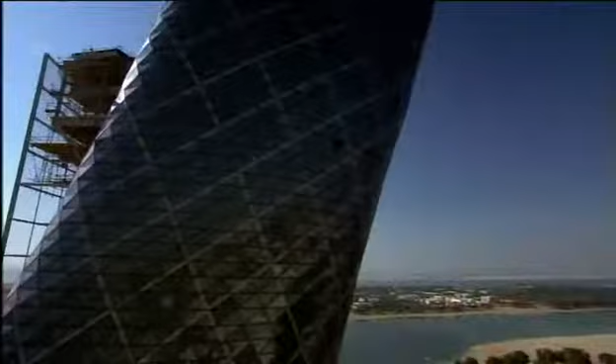Dubai is famous for its audacious engineering projects. But now, its neighboring city, Abu Dhabi, could surpass them all. This is Capital Gate, the most inclined skyscraper on the planet. It defies gravity, leaning at almost 5 times more than Italy's Leaning Tower of Pisa.

To make it stand up, it'll take some extraordinary engineering that could rewrite the skyscraper rulebook.

Situated on the edge of the Persian Gulf lies the Sheikhdom of Abu Dhabi. It's the largest and richest of 7 states that unified in 1971 to form the United Arab Emirates. Abu Dhabi is undergoing one of the biggest makeovers of modern times.

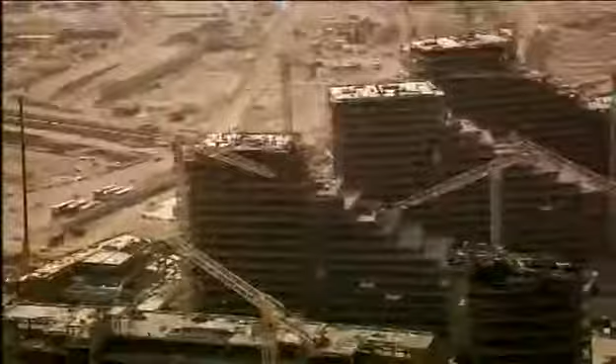Its ruler, Sheikh Khalifa bin Zayed Al Nahyan, wants to join the City Super League. And he's spending over $200 billion to transform his capital into a world-class business and tourist destination. He's already spent a reputed $3 billion creating the most expensive hotel ever built.

The Emirates Palace boasts 114 gold domes and is the height of luxury, where rooms cost up to $12,000 a night. And that's not all. He's built one of the largest and most opulent mosques on earth. Capable of accommodating 40,000 worshippers, the Grand Mosque boasts the largest carpet on the planet and the world's biggest gem-encrusted chandelier. But even these structures have not quenched his thirst for the extraordinary.

Now, the Sheikh wants a building so spectacular, it will instantly become an international symbol for Abu Dhabi. The man appointed with the task of delivering this architectural icon is the Sheikh's cousin, His Highness Sheikh Sultan bin Tahnoon Al Nahyan. Architecturally, it will be a unique building, positioning Abu Dhabi as one of the cultural hubs around the world. And architecture is part of that overall inspiration and art.

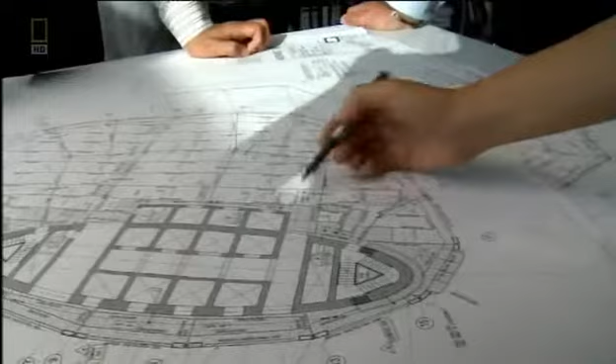It's a tough challenge. This is a land where extreme engineering is the norm. Neighboring Emirate Dubai has already built the world's tallest skyscraper, the 828-meter-high Burj Khalifa, and an iconic luxury hotel, the Burj Al Arab. Sheikh Sultan signs up a team of architects and gives them a clear brief, not to go bigger or taller, but to challenge the rules of architecture.

For Neil van der Veen, one of the concept architects, it's a unique opportunity. The spirit of the times in the UAE was that anything was possible. Really, you could do anything. We can do something in the architecture that will represent that Abu Dhabi is right at the cutting edge.

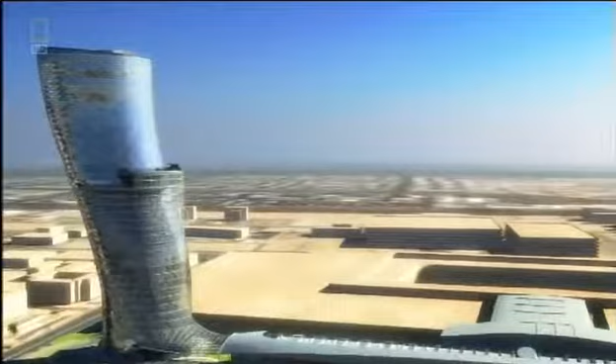The team come up with an extraordinary design. A tower that spirals out of the ground to 160 meters, inspired by a desert whirlwind and the splash of a wave rising over the sand. This gravity-defying skyscraper tilts almost 5 times more than Italy's Leaning Tower of Pisa. No single angle of this tower is the same as another. It's a structure guaranteed to amaze.

We really wanted this to happen. They could see a vision suddenly. They could see something that would stand for them. Then there was no stopping us. Sheikh Sultan wants the lower floors to become the most prestigious office address in Abu Dhabi, with the top 18 levels assigned as a 5-star hotel fit for royalty.

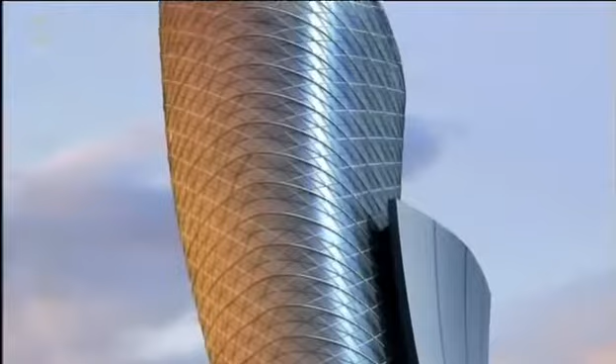But for maximum impact, this landmark skyscraper also needs a prestigious location. The Sheikh decides the tower will stand next to a monument of national importance, the Grandstand. Built by his uncle and founding father of the United Arab Emirates, Sheikh Zayed, it's used to this day for national celebrations. This monument and the skyscraper will link Abu Dhabi's future with its past.

Over the past 50 years, this land has experienced extreme change like no other. The discovery of huge oil reserves in 1958 set the wheels of progress in motion. Abu Dhabi's ruler, Sheikh Zayed, had a vision to unify the sheikhdoms and secure their financial future from Western dominance. He then set about using his black gold to create a city that rose out of the desert.

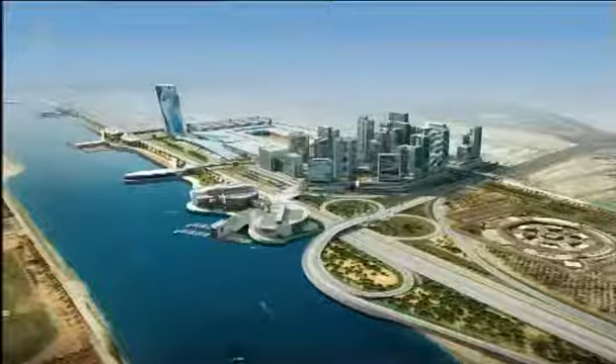Today, Zayed's legacy is all around, and now his son wants to leave one of his own. To transform Abu Dhabi once again, but this time to put it on the world map. Sheikh Khalifa plans a new $2 billion business district called the Capital Center, situated alongside the Middle East's largest business hub, the Abu Dhabi National Exhibition Center. It's the ideal location for an architectural icon. And inspired by its location, the new tower is named Capital Gate.

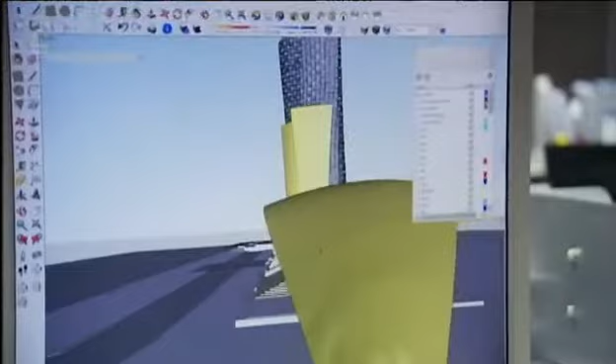Now, the idea must make the leap from the drawing board to the construction site. The only problem is, no one has ever attempted a skyscraper like this before. Everyone realized that this is a crazy structure to build, and how are we going to build it?

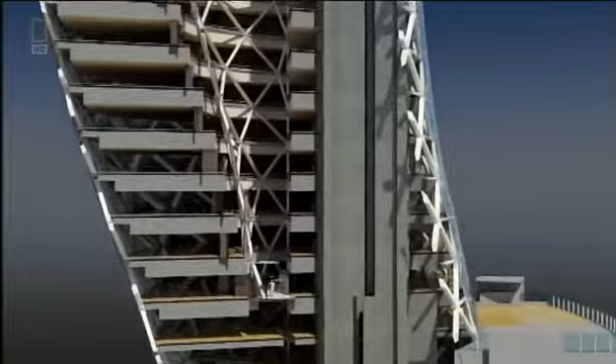To make Capital Gate's gravity-defying design a reality, it'll take some extraordinary engineering, and the challenge begins on day one. Its top floors overhang its base by 33 meters, creating huge forces that want to rip the building's foundations out of the ground.

At the construction site, project architect Tony Archibald is daunted by the task ahead. When I first joined the job, I was shown the drawings, and I kind of did a double take, and I wasn't quite sure that I got the correct understanding of the project, and it took me a few moments before I realized what we were about to undertake.

Keeping Capital Gate upright is a huge engineering challenge. There isn't just one solution. To overcome the forces of gravity, it will take a whole range of pioneering techniques. But the task starts with the foundations deep underground. On one side of the building, the weight is going down into the ground. On the other side, it's being lifted out of the ground. And that's due to the large overhang that we're having to deal with.

The solution requires almost 400 concrete piles that work in 2 different ways. On the leaning side, half of the piles push the overhang's forces into the ground. On the opposite side, the remaining piles anchor deeper into the bedrock. They resist the stretching forces trying to wrench the building out of the ground.

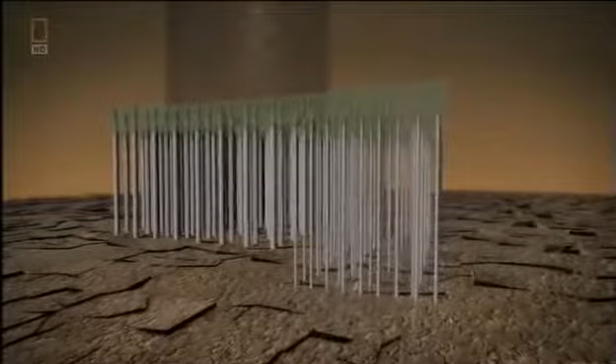Finally, to evenly distribute Capital Gate's forces into the piles, a deep concrete slab reinforced with steel is laid on top. What the foundations taught us is that every single aspect of this building has to be custom engineered.

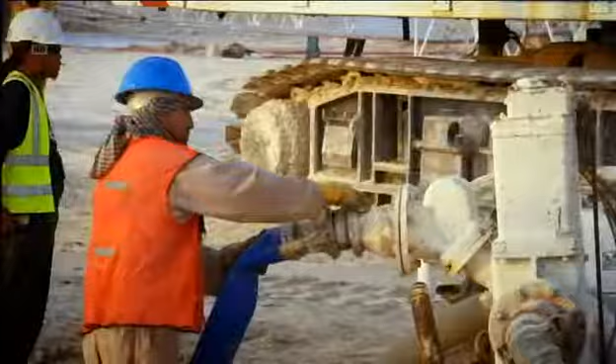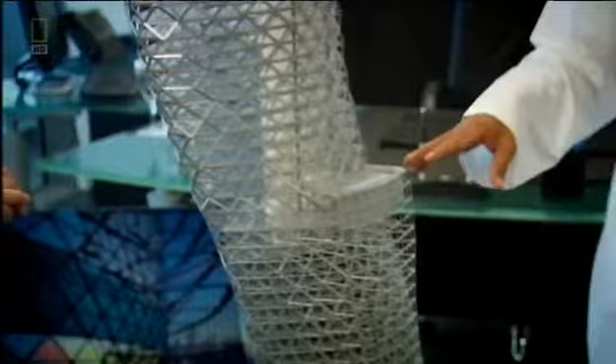Excavators dig out a colossal 6,000 cubic meters of sand. And over 8 weeks, hundreds of piles are driven into the ground. We had an awful lot of piles to put in very close proximity. It was a really difficult challenge. There can be no let-up on this schedule. Sheikh Sultan wants Capital Gate complete by an impossibly tight deadline.

In less than 2 years' time, Abu Dhabi will host the World Future Energy Summit. Over 3,000 delegates from 50 countries and the world's press will convene at the neighboring Abu Dhabi National Exhibition Centre. It's the perfect opportunity to showcase Capital Gate and prove Abu Dhabi is at the forefront of innovation.

But this gives the team just 24 months to design and build a unique skyscraper. With the foundations finished, building above ground can begin. But because of the dramatic lean, it will have to be constructed in a very different way to a conventional skyscraper. We realized once we'd done the foundations that this was going to be the first of many difficult problems.

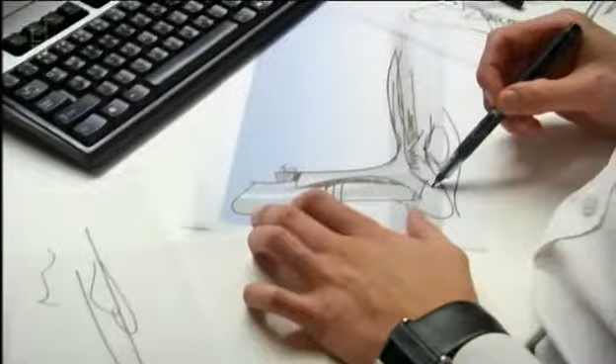A normal skyscraper requires a solid core to hold it upright. But Capital Gate's curves would just crack and topple a standard core. Engineers must discard conventional thinking and devise a way to defy gravity. Inspired by the nearby desert landscape and its wind-shaped dunes, architects have designed a curved leaning tower. But it'll take some audacious engineering to stop Capital Gate from falling over.

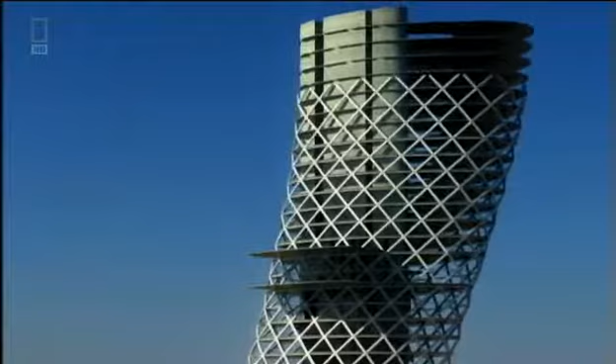Normal skyscrapers are built around a slim vertical core, which helps to channel the building's weight into the ground. There's so much overhang on this building that a conventional core was no way going to work. You just can't build a straight core. It's just not strong enough. Capital Gate's design would cause a conventional core to bend dangerously. The pull of the massive overhang wants to stretch the core on one side, causing the concrete to tear apart.

Structural engineer Mona Vassi knows it's a serious problem that must be solved. When I saw this one, I thought it's impossible, it's not going to work. It's just some sketch somebody left somewhere. But I always think that for the architects, it's easier for them to just draw something, but it's not easy for us to fulfill or satisfy their needs.

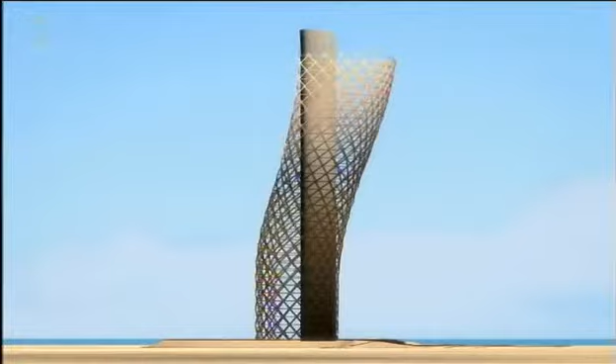The engineers developed two groundbreaking solutions. The first part of their plan is to build the core with a curve, bending in the opposite direction to the building's lean. As the structure grows, its weight pulls the core straight. In total, it shifts 350 millimeters, and the effect is significant.

The concrete that would have been stretched by the overhang's pull will now be compressed and strengthened. You build it bent, and then as you add the slabs to the upper levels, it pulls it back into vertical. So basically that whole vertical core is in compression, and that gives it immense strength.

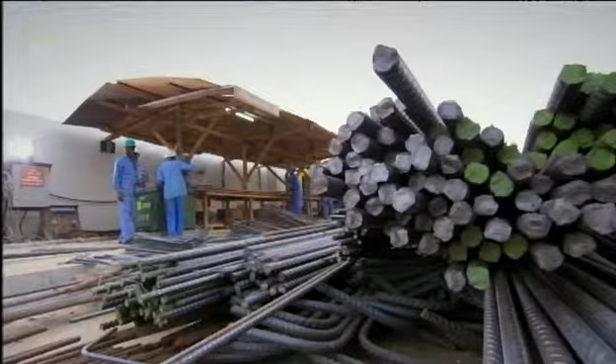The core grows 4 meters a week, and construction manager Les Fairchild is in charge of building it. This is probably the most complex core that I've come across. It's built at an angle and effectively the core holds the whole building up. The core is built using a technique called jump forming.

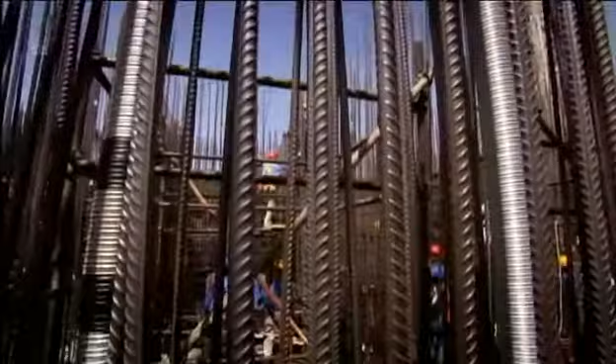First, a dense mesh of steel reinforcement is assembled. A mold then closes around the steel to form the shape of the core. The steel mesh is then filled with concrete. Then the mold or form can climb up the core wall for the process to start all over again. Jump form is a hydraulic platform. Once we've cast each 4-metre level, we simply attach it to some runners and we jump it hydraulically up to the next level.

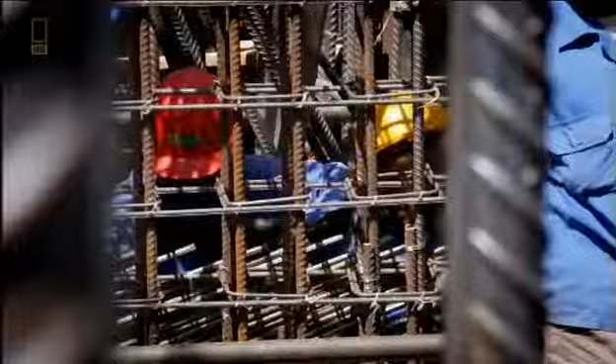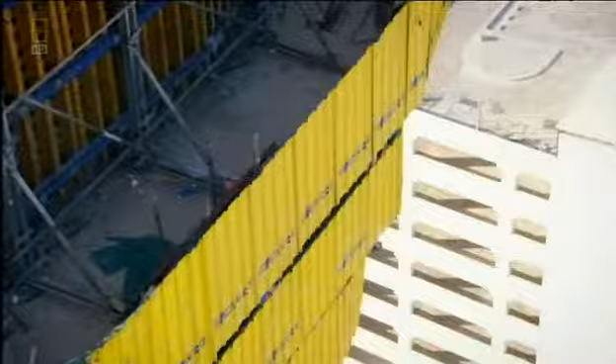The core will be strengthened as it straightens. But for the core to carry extreme loads, the concrete must be reinforced using steel rods called rebar. The rebar is installed during the daytime, but temperatures of up to 50 degrees Celsius and concrete don't mix. It dries too fast and could crack. To set at the right speed, the concrete has to be poured during the cool of the night.

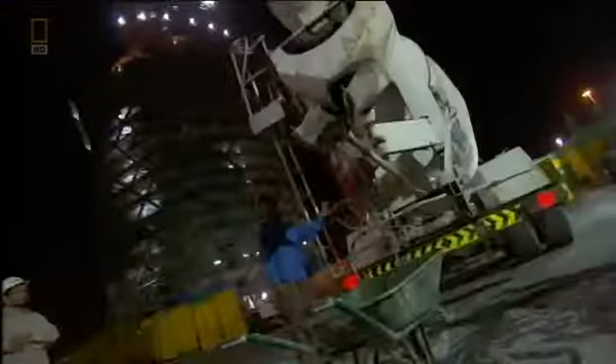As the core grows higher, the liquid concrete has to be pumped over longer and longer distances. So the consistency of every batch is first checked in a slump test to ensure it won't block the pipes. When you first see it coming out the wagon, you can usually tell whether it's a tight mix or a loose mix, and that's what we're testing for really in the slump test. We simply make a cone, lift the cone off, and depending on how much it reduces in height, tells you exactly what the slump is. The one we just witnessed is 215 millimetres, which is within the specification, so that's good to go.

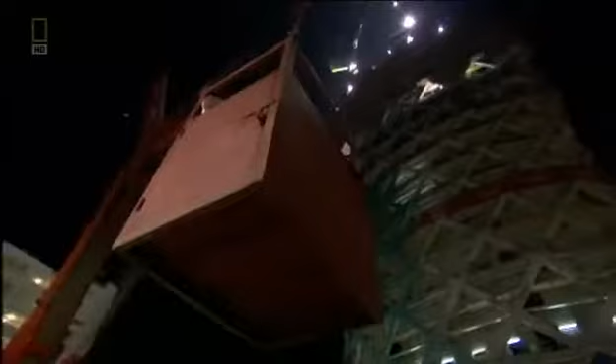Whilst the truck drives to the pump, Fairchild needs to get onto the core. He can take the stairs, but 90 metres up is a long climb. He knows a much faster way. Crane lift.

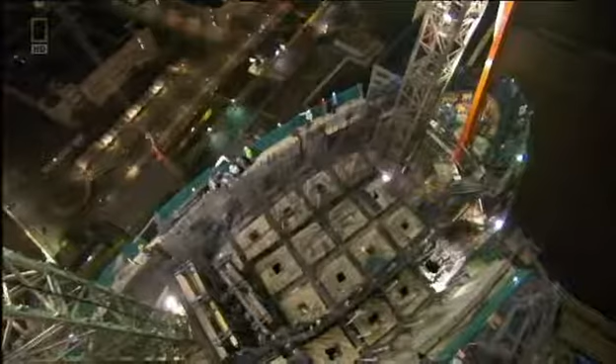It's going fairly well. We've had a nice continuous supply of concrete, and we're now pumping it up to the upper levels of the building. And the lads are just steadily working away. They actually work from one side to the other in metre deep layers, so they're doing everything right. It's always exciting when we pour concrete. It means it's another achievement really. We're going up another level.

But building the core out of alignment and packing it with rebar still isn't enough to stop gravity toppling Capital Gate. What we came up with is a post-tensioning solution where we introduced much more reinforcement into the core wall and then used the tensioning process. Basically that was done by introducing high tensile strands to the centre of the walls.

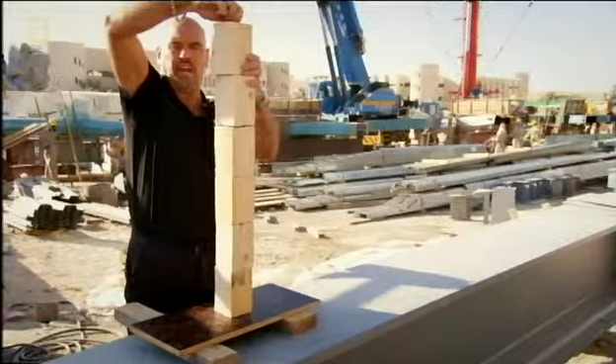When we reach the designated height, we simply apply tension. We're actually stretching the tendons that fall through the wall, and we're pulling them tight, and that's done by a tensioning machine. So effectively, when the tension is complete and the load was applied, the core would stay intact, and the additional reinforcement would prevent it from falling over. To post-tension the core, 146 steel tendons are threaded vertically through the concrete.

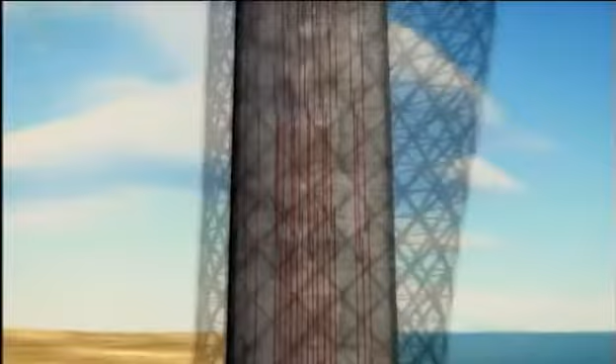Each tendon is 20 metres long and runs through 5 floors of the building, overlapping each other for maximum strength. When the tendons are stretched, the stress counteracts the pulling force created by the massive overhang, stopping the concrete from tearing apart. Okay, stop. Okay, start moving. On site, the team are post-tensioning the core. But no one has ever attempted this vertically in a skyscraper.

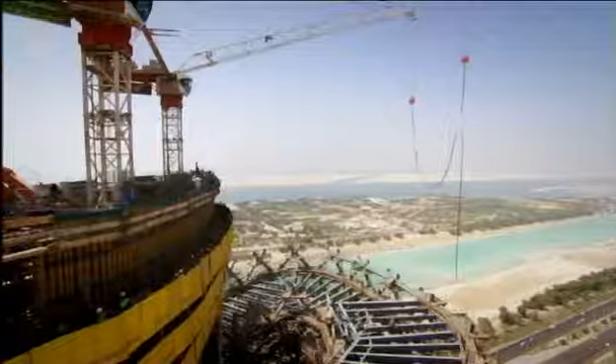The long tendon is lifted to the top of the core. The team used the steel tendon's weight to force it through a duct already cast through the core. Once the tendon is in position, the team lock off both ends, ready to tension its individual strands. A pneumatic jack clamps around one strand at a time and stretches it. It's equivalent to about 5 family cars pulling on one end of the rope.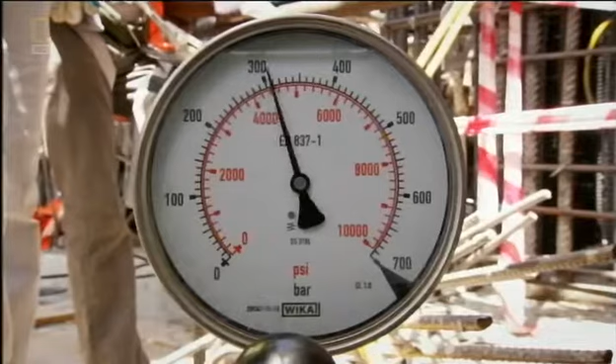With the steel tendon now stretched to the right stress level, concrete pouring can continue upwards. The quantity of cable that's being used is approximately 120 tons and 120,000 meters in length. It's about 44 times the Golden Gate Bridge. This process is repeated over and over and means the core should withstand the huge loads generated by Capital Gate's extreme overhang.

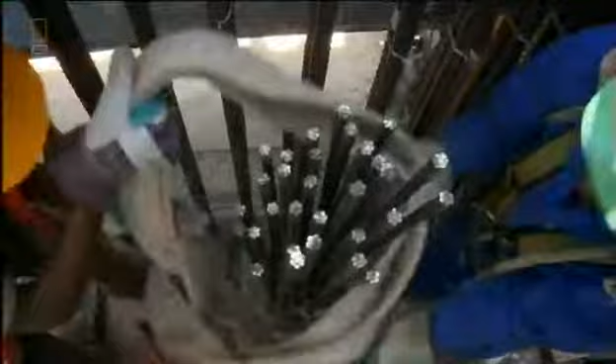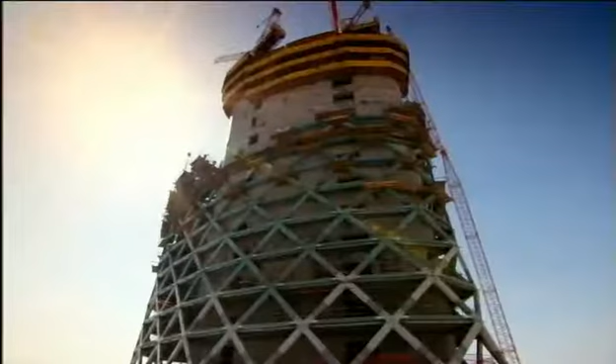But now, an even greater challenge must be tackled. The building's twisting, leaning design must somehow be turned from theory into reality. And once again, it'll mean bending the rules of architecture. To create Abu Dhabi's architectural icon, Capital Gate needs an exterior curved leaning frame. But once again, the building's extreme tilt creates a problem.

The shape of the building with this very pronounced overhang meant that traditional skyscraper building solutions just weren't going to work. There's no way. The building design requires it to be thin to maximize floor space and allow for huge panoramic windows. Irfan Ahmed is one of the engineers who has to find a solution. For structural engineers, always it's challenging to accept the architectural requirement, you know. They always want thinner and thinner and thinner.

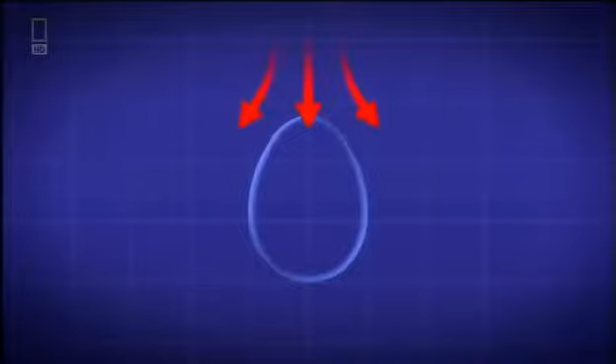Surprisingly, the humble chicken could help with this engineering dilemma. It is essentially a skin of structure around the outside of the building, not unlike an egg. An egg can withstand huge loads because it evenly distributes forces down through its shell, which means the shell can be thin, creating more space inside. So it's very, very thin, it's very, very strong. If I try to crush this egg, you can see that it's actually amazingly resilient. So let's see how resilient.

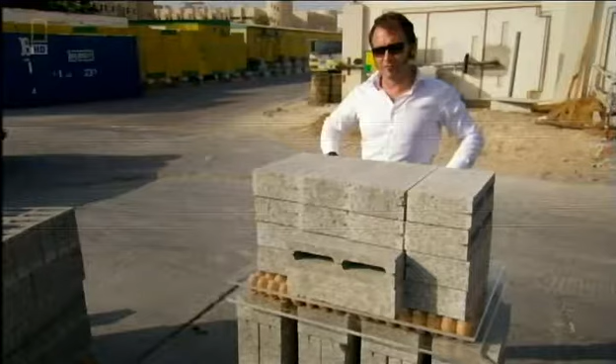Here I have 170 eggs laid out, and we're going to put load on top of these in the form of breeze blocks. Moment of truth. So far, so good. Each one of these blocks weighs 15 kilos. So we've nearly got half the weight of a car on here now, on our 170 eggs. Let's see how far we can push this. That's 30 blocks, and I think it's about to go. It's going big time now. This is it. This is the end.

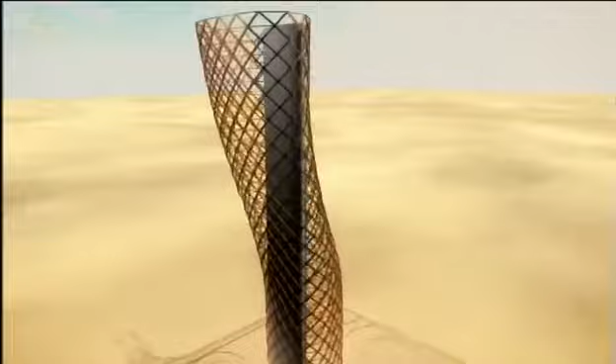A diagrid is a giant mesh of steel that wraps around the core. Steel beams connect to a node or joint to form a cruciform section. 720 uniquely shaped sections link together to form the thin but immensely strong diagrid. Working together, these cruciforms equally distribute the forces down the outside of the building. The way it does that is by making a uniform net, so that the forces are very evenly distributed. And that means that we can get away with slenderer sections.

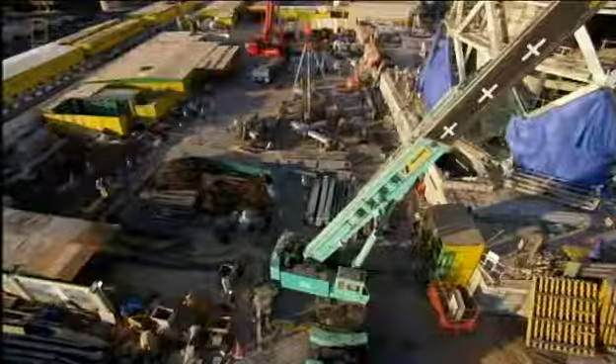On site, a team of 240 steel fabricators assemble the diagrid. They've built the easier straight part of Capital Gate's base, but now the structure is starting to lean, making installation even more challenging. Each cruciform, weighing up to 16 tons, has a unique geometry and must be crane lifted at a precise angle. If the diagrid is not assembled with millimeter accuracy, the mesh will not channel the loads and the structure could be weakened.

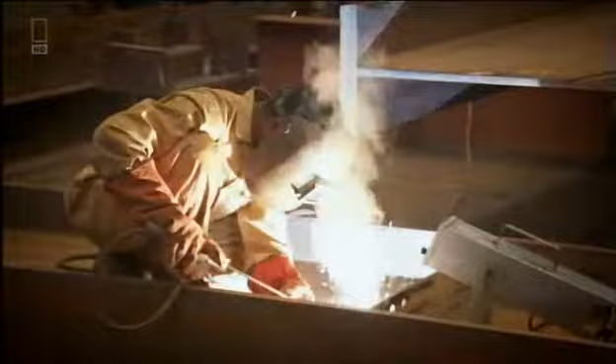The engineers must communicate closely with the expert steel fabricators. They design and manufacture the diagrid 150 kilometers away in the neighboring emirate, Sharjah. Here, cutting-edge construction is the norm. They've built one of Malaysia's Petronas Towers and Dubai's iconic skyscrapers, the Burj Al Arab and the Burj Khalifa. But Capital Gate's revolutionary design pushes even these experts to the limit.

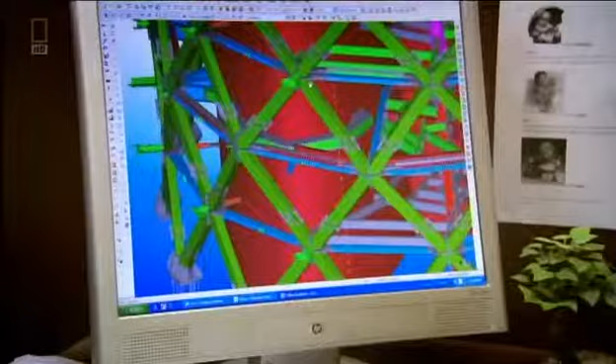On the planning floor, project engineer P. Bhaskaran and his team need bespoke 3D software to tackle the building's highly complex diagrid. The 3D modeling is done, and any unforeseen criticalities will be very clearly identified in the 3D model. Each one of the 720 cruciforms is precision engineered, not only to channel huge forces, but to connect with millimeter accuracy to the neighboring cruciforms and the glass facade. But to measure their exact angles, the team used some old-school technology: chalk. It might look unsophisticated, but it's highly accurate, ensuring all the elements will join together.

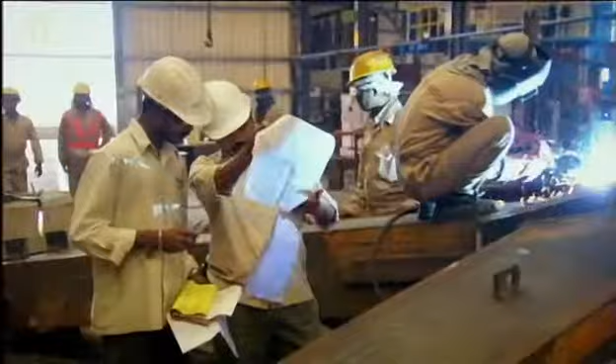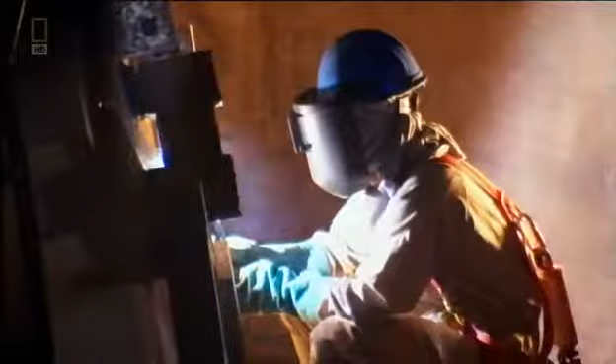To keep up with construction, the factory must produce 18 cruciforms every week. Constructing such a huge building, a critical building within the short span, without working 24 hours, it is absolutely not going to happen. As the skyscraper reaches new heights, the long hours start to pay off. This design pushes the diagrid technology to its absolute limit, and in fact far beyond what's ever been achieved so far. Even in your dreams, you're thinking about this project. So once you see the structure coming up, you forget all the long hours you spend and all the sleepless nights.

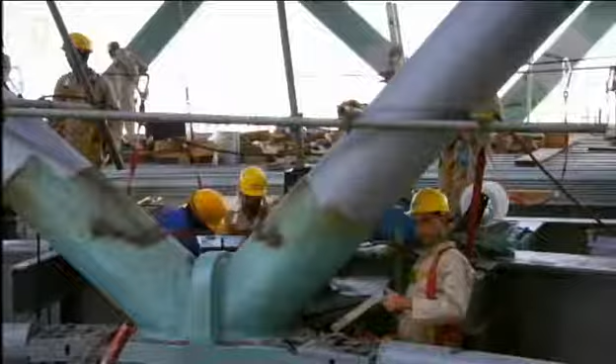A colossus is fast emerging from the Abu Dhabi sands. Now, this leaning tower must be clad with a glass facade. And as always with this gravity-defying structure, it's going to require some revolutionary engineering.

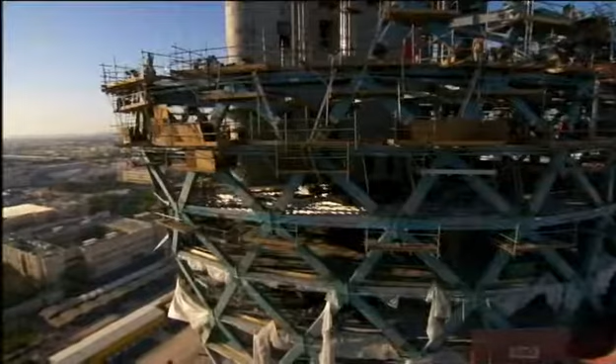Glazing Capital Gate's leaning curved frame is a major problem. Covering its unusual contours with curved glass will blow the budget. So the skyscraper's curves must somehow be clad using cost-effective flat glass panes. Fortunately, ancient Greek geometry can help.

Because you've got a complex shape, it's an organic shape, it's a curved shape. The only way to model that with straight lines is to use triangles. Triangular panes can pivot in 3 directions, and when joined together can cover complex geometric surfaces. But because every angle of the building is unique, it'll take 26,000 triangular panes to form the facade.

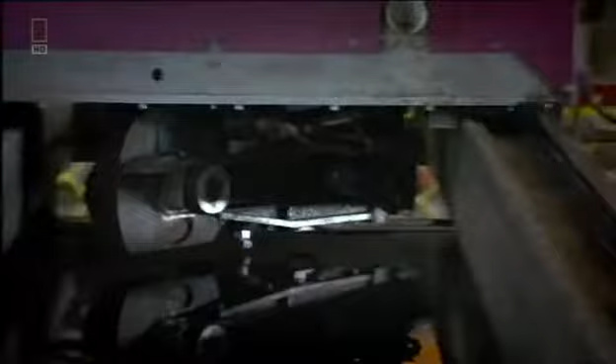With so many glass triangles to cut, the local glass factory springs into action. Each pane is scored by an automated diamond cutter to an exact pattern. The triangles are then sent along the production line. The team is under constant pressure to deliver enough glass to the site. Hey, this side, 2 guys, hold it.

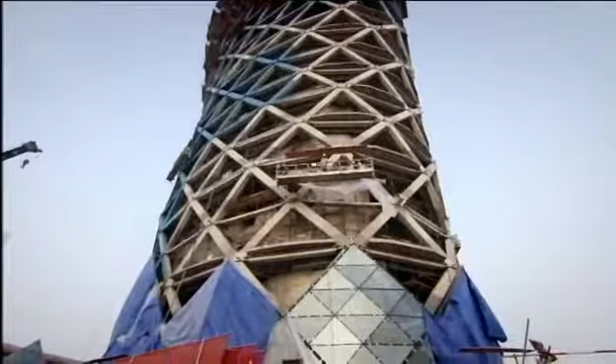After several weeks, 8 diamonds are in place and another 100 standing by. But the glass design is so unconventional, it still has to pass a number of tests to prove it's up to the job. Because we'd already started the glass installation, the results of this test were absolutely key. Each panel is stacked one upon the other. So if we'd had any kind of problem, we would have had to unstack them, which would have had disastrous consequences for the program.

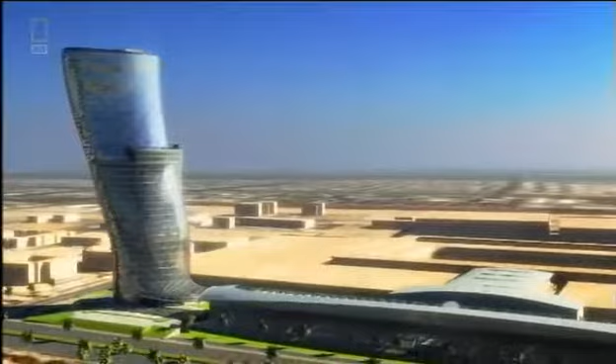This is no ordinary glass skin after all. Capital Gate's core straightens as it grows. The skyscraper will not stop moving until after completion. Normal glass facades can accommodate minute movements caused by wind and temperature changes. But to stop the glass shattering and keep the building watertight, the panels must be designed to shift by up to 20 millimeters. The scale of that kind of movement is almost unheard of in glazing systems. It's a vast amount of movement.

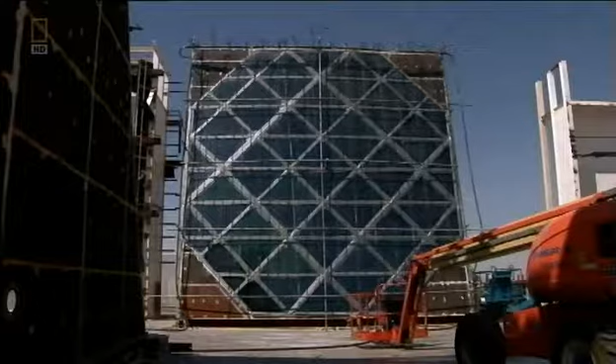With glass installation ongoing, construction manager Craig Rooney needs to know the panels will perform. We don't want to get to the top, we've done it, we've installed it, we think we've done a great job and then it all leaks. The panels must be tested to the limit at a Dubai laboratory. A plane engine and many litres of water simulate worst-case scenario weather.

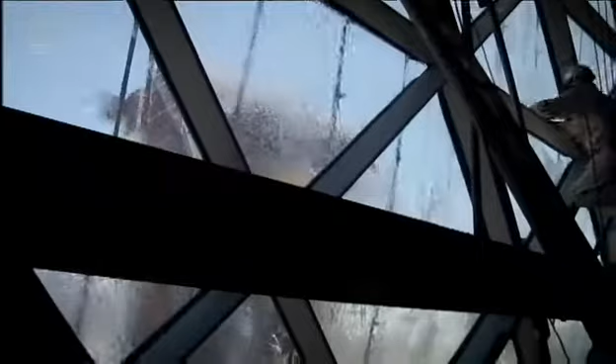Now the moment of truth. Any leaks could be a disaster. And it's bad news. The first time we got a full water test, we had a leak. The fact that we had a leak was devastating to the whole team and very alarming. The diamonds connect to each other by a bespoke two-layer seal. The flexible spongy seal allows the diamonds to move and keeps water out. But if any water does seep through the outer seal, drainage tubes fitted at intervals let the water flow away.

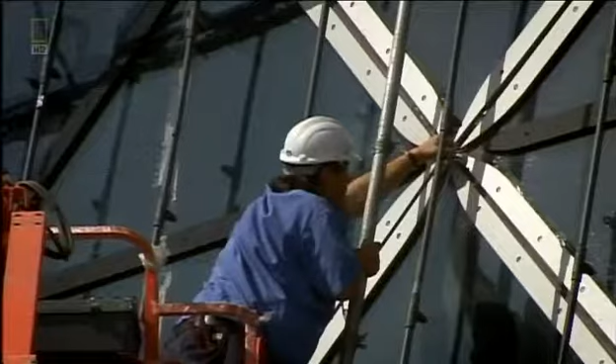The panel has failed the test. Water has flooded inside and penetrated the inner seal. If it was a fundamental failure, we're back to the drawing board, so the cost and the budget and the program all go completely out the window. The panel is examined. Answers are needed fast. Fortunately, it's not a design failure. They discover a drainage tube is only blocked with sand. The problem resolved, installation can step up a gear.

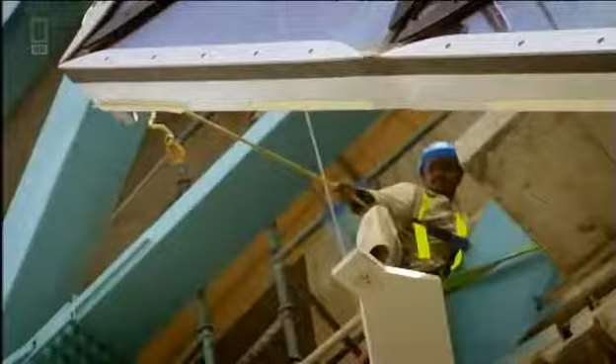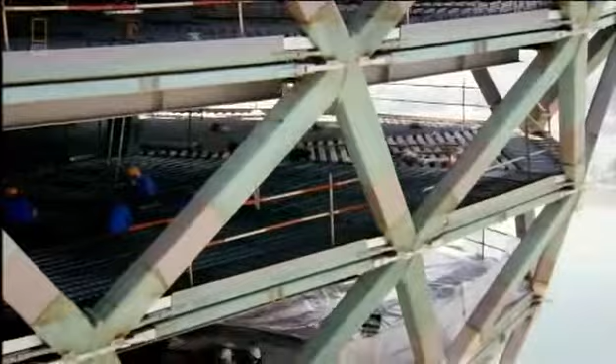But as always with this audacious building, one problem is solved and another is just around the corner. To give Capital Gate's five-star hotel lobby the wow factor, architects again plan to push the design to the extreme. Now they want to build an infinity pool and a restaurant, hanging 100 meters above the ground.

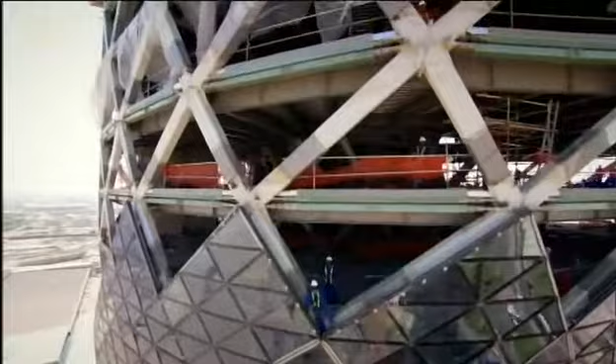18 months into the build, Capital Gate's design is about to give a new slant on high-rise living. The architects want a pool deck and restaurant suspended in the sky, but it's an engineering headache. There's so many requirements that architects had that really put us in so much trouble as engineers. But you want to make sure you have a safe structure.

The design calls for a two-story extension, hanging without any visible support. But the pool's water alone will weigh 150 tons. The structure's huge mass means it needs reinforcement. We needed some supports from below, otherwise there was no other solution. I don't think you can have a cantilever that huge on this building, no way. The design will only work if it's underpinned with 22 steel struts. They will carry the loads back into the building. But the struts must also look delicate to meet the architect's aesthetic demands.

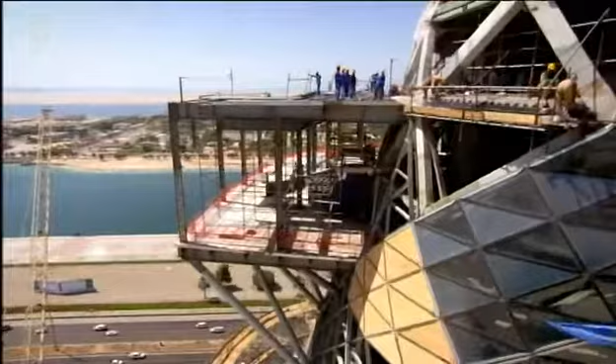At the construction site, 90 meters up, the pool and restaurant is taking shape. All of its structural elements are in position, except one. The team are raising its last 6-ton floor beam.

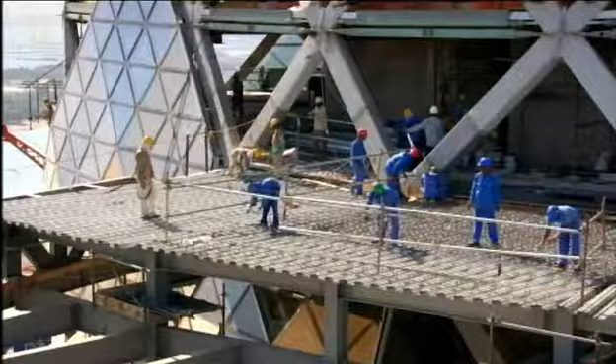It's taken many crane lifts, but one of the highest suspended swimming pools in the world has made the leap from blueprint to building. See all those lines that you just drew? They're actually drawing the same thing for you, but with a crane. But the feeling is indescribable.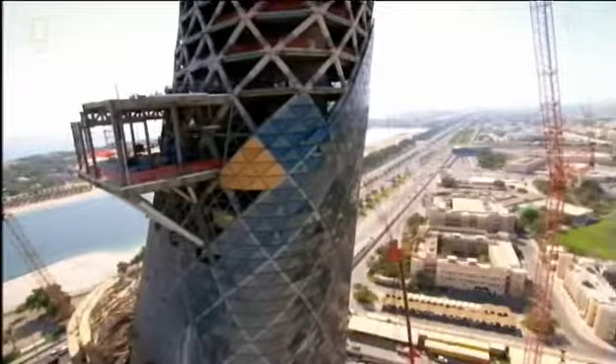And the structure's muscular struts and connections are also elegant. The idea behind these junctions is that they behave like the insects that can walk on water. They're sufficiently light that the surface tension keeps them above the water. So these little brackets dissipate the forces from all that weight.

Capital Gate is fast becoming an Abu Dhabi landmark. But the taller it gets, the more the weight of its upper floors is a problem. The skyscraper needs to go on a diet. And this time, the architects come up with a clever solution. The building has lots of visual surprises.

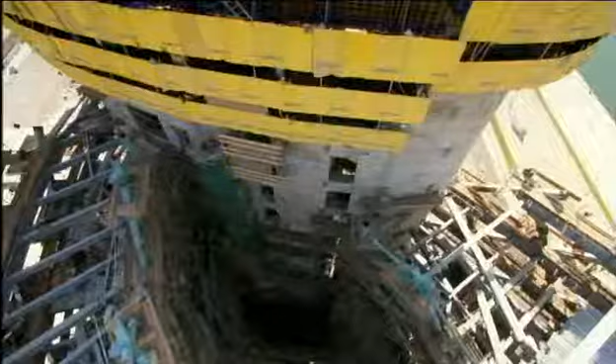And one of the most important ones of those is the internal atrium. It's a kind of a light well that brings light from the sky deep inside the building, and it extends over half the height of the building. So it starts out very, very small at the bottom and opens out in a big funnel. This cavernous hole is good news for reducing weight and minimizes forces.

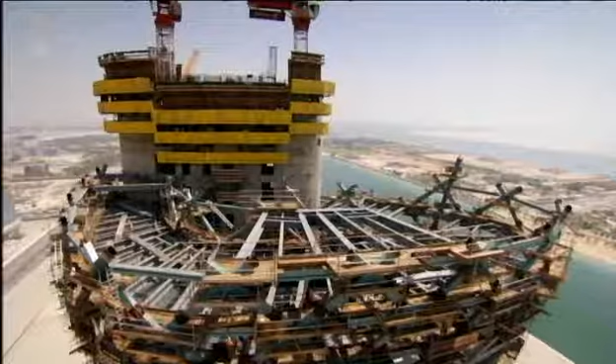But the atrium is a double-edged sword. The floors are critical in transferring loads from the diagrid to the core. A giant hole through 18 floors means these loads must find another pathway. It's a very, very big hole in every single floor plate. So our engineers really had their work cut out.

You don't want to have an opening in your floor. You want to have more reinforced concrete to transfer these forces. The forces need to flow away. And the solution is pioneering. An internal web of steel mirroring the external diagrid. This is the first time we've ever heard of this being done.

The internal diagrid is actually a fundamental part of the structure. This funnel-shaped internal skeleton carries the forces of an 18-story building down to its tapered base and into the core. But the loads are extremely high for such a small area. To stop the atrium punching through the core wall, the concrete needs protection.

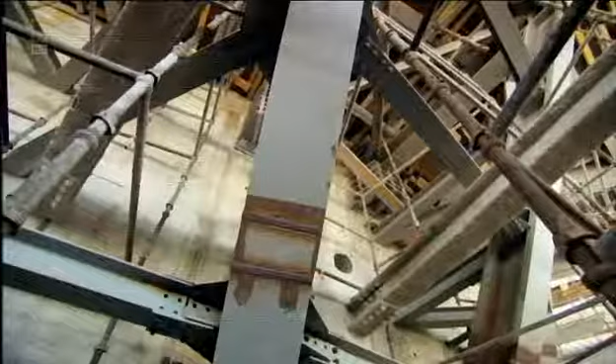The answer? Six giant steel bracket connections to the core wall. The connections are really a wonderful, wonderful piece of engineering. They're 8 meters high, they span 2 floors, and they connect back into the core. The atrium's near completion brings Abu Dhabi one step closer to achieving an iconic landmark.

But as the sun goes down, this isn't the only celebration underway. On site, the Indian steel team are holding an annual blessing to the Hindu god Lord Vishwakarma, the protector of architects and engineers. Their livelihoods depend on staying safe, and although they use safety equipment and are highly skilled, working with huge sections of steel at height is never risk-free.

We pay our respect to God and get the blessings from the God. We do that for the safety of all our workers and for the proper completion of the job. Every trade of workers, the basic tools they are using on site, has to be kept in front of God, and the workers feel that they are in safe hands. The tools are now blessed, and the steel team's morale is high.

But the glass installers, lifting diamonds to over a height of 100 meters, are getting the wrong kind of lift from Abu Dhabi's highly unpredictable wind. If the wind is too strong, then you can feel this in your hands when you hold these diamonds by rope. I always get nervous if I see the panel starting turning. And this makes me always a little bit afraid when I see diamonds going up and starting moving. Meyer has to act quickly, or this 4-ton diamond could smash into the building.

Not for the first time, lifting glass is delayed by changeable weather. At this rate, Meyer won't install the remaining 107 panels in time. But Abu Dhabi's wind isn't the only problem the Capital Gate team face. A last-minute design request comes in from the Sheikh's office that could have serious implications.

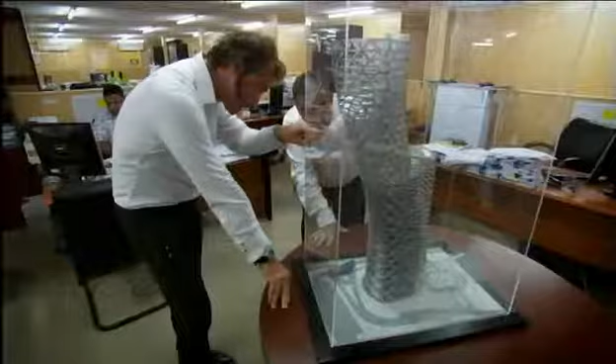Integrating what will be Abu Dhabi's highest helipad atop one of the world's most daring skyscrapers at first seems a simple request. But it actually poses 2 serious problems. It'll create new forces that must be absorbed by the already strained core, and unpredictable wind flows that can cause potentially lethal flying conditions. You get a thing called wind shear, tipping the whole helicopter onto its side. And this is a very real and very dangerous risk.

These rapid wind changes, known as wind shear, can affect the lift on helicopter blades. Aircraft can be blown off course, or literally fall out of the sky. There is no way that we could have any margin of error on the safety. The only way we could predict what the wind shear would be like on the top of the building was to model it in a wind tunnel.

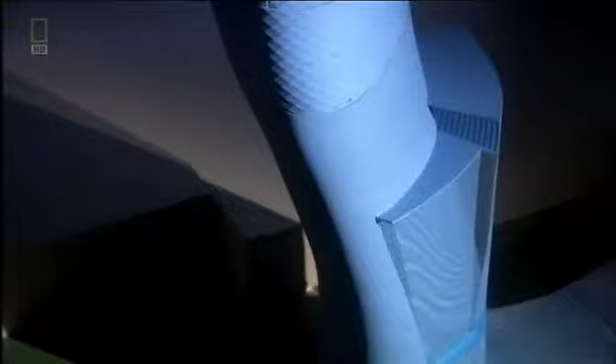In London, England, a scale model of Capital Gate is put through its paces in a high-tech wind tunnel. Just as the team fear, within seconds, wind shear conditions appear. Air currents are flowing over the top of the building, but then separate from the surface, spiraling inward to form a realm of turbulence.

Wind impacting the helipad is also creating huge suction forces. We're talking about very large forces here wanting to pull the helipad off the top of the building. Something in the realm of several large trucks or big rigs trying to pull this helipad away.

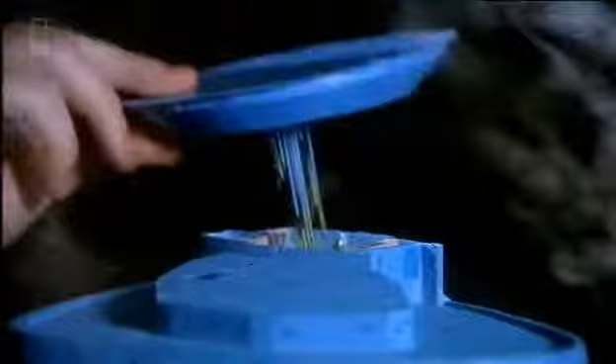To make the helipad safe, Aurelius and his team have to go against conventional thinking. We didn't think that lowering the helipad was actually going to be the optimum design, but we see reduced loading on the helipad as well as safer conditions for the pilots to land in. Lowering the helideck to just 2 meters above the roof dramatically decreases the wind shear threat, and means Capital Gate's core will withstand the additional loads.

We're relieved, frankly. The tests have actually confirmed now that we can actually have it in our original design position, which is very low, which will mean that the profile on the skyline is exactly where we want it. But it'll take another 5 months to just draw up the helipad's blueprints, and a crane must be left behind to build it.

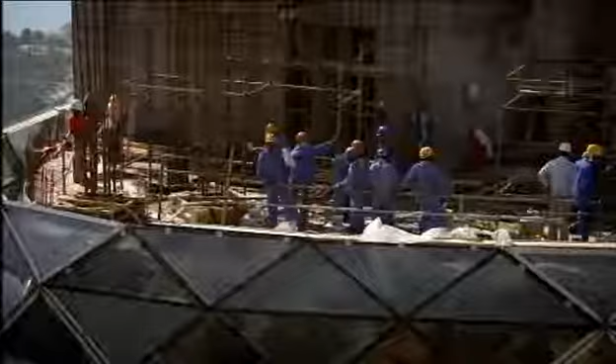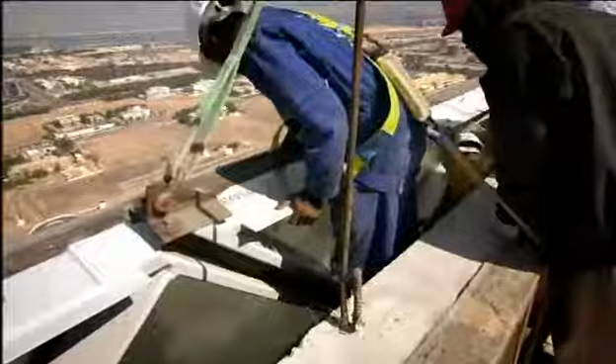Now, with only weeks to go until zero hour, the team are installing one of the last glass panels. It's a moment that once seemed a long way off. In my office I have a plan of all the diamonds we have to install, and in the beginning it looked like I'm in jail and I'm marking the wall with marks for each day. And so at first I felt I would never finish this project. Just 10 months since the first diamond was fitted, the facade now shimmers in the sun.

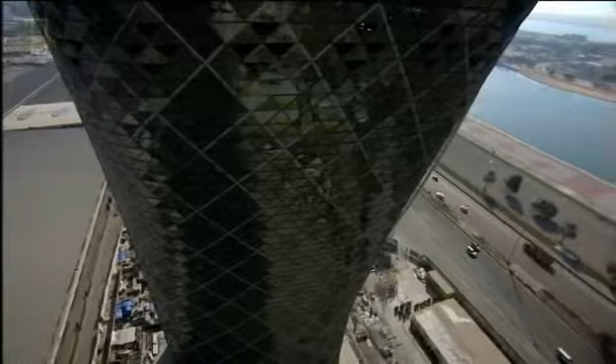Capital Gate's internal fit-out will take another year. Only then will its 5-star hotel and Abu Dhabi's most unusual office address be open for business. But against the odds, the team have created one of the most extraordinary megastructures on the planet. Capital Gate twists and spirals out of the ground, soaring to a full 162 meters. It's taken nearly 6 million man-hours to construct, and its overhang is spectacular.

You see the building and you stand underneath the overhang. It's extremely impressive. It's a fantastic feat of engineering. I feel as though I've been here an eternity, but it's probably been the quickest 2 years of my life. It's been an amazing journey and we've learned so much. And actually I think we've demonstrated that some things that looked impossible or even ridiculous were actually possible.

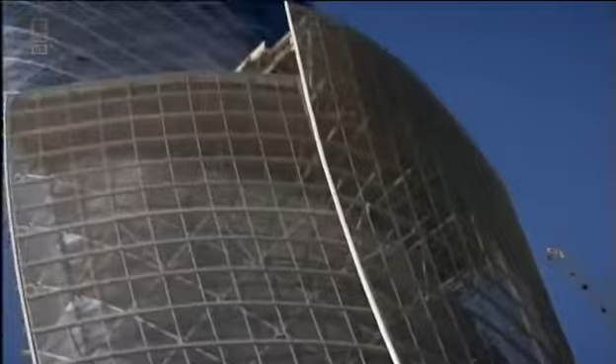And Abu Dhabi's past will soon be physically linked to its future by a wave of steel that'll rise over the grandstand and splash up the skyscraper's mirrored glass. Abu Dhabi is a fascinating part of the world to be at the moment. It says to people we can step outside of the box. We don't have to follow the rules.

With the 2010 World Future Energy Summit just weeks away, Sheikh Sultan can be sure Capital Gate will show the world what Abu Dhabi is capable of. This building is really iconic. It catches the spirit of Abu Dhabi and will be part of the postcard image of Abu Dhabi. The team have achieved what some thought was impossible. A leaning tower that claims the world record for the most inclined skyscraper on Earth.